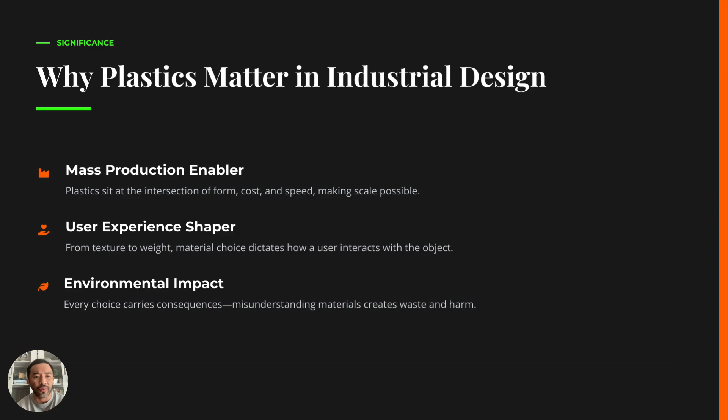Plastics are very powerful because they sit at the intersection of form, cost, speed, and accessibility. So, a designer who understands plastics can control the scale by which you apply your plastics onto your products in industrial design. A designer who misunderstands plastics can also create waste and failure or harm in the environment.

So, how do you read a material? What key properties should you consider when it comes to choosing plastic? I'd like you to think of the material as a system and not just the material as it is, and not just as a data set or some numbers. Every property affects the form, the manufacturing, the lifespan, and the disposal of the product that you are designing. Good industrial designers do not just memorize these properties, but they interpret them.

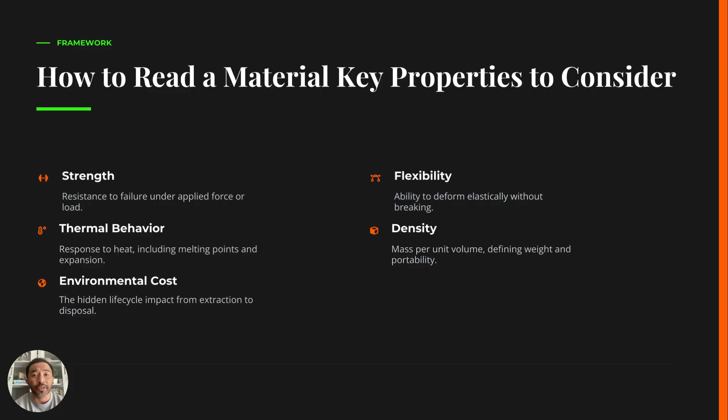So, for example, the strength of a plastic, the thermal behavior, so how it responds to heat, including the melting points, the environmental costs of choosing such a plastic for your product, the flexibility or the ability to deform, elasticity even without breaking the plastic, and the density of the plastic, which is what defines the weight and the portability of the plastic that you would choose in your design.

So let's talk about ABS first. ABS is the material of controlled toughness. ABS does not shatter easily, and it is a plastic that tends to absorb shock. That's why it lives in dashboards, in electronics, and places where failure would be visible and dangerous.

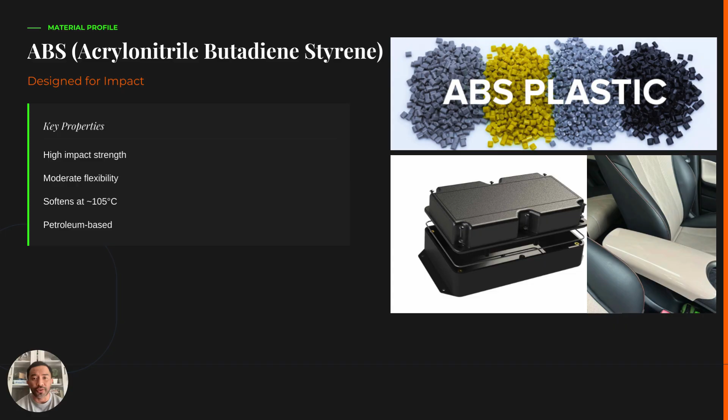But ABS also tells us something uncomfortable. And what is it? It is that its durability often comes at a certain environmental cost. Yes, it is strong, it is moderately flexible, but again, it is petroleum based, and therefore it has some repercussions when specifying this kind of plastic for your product.

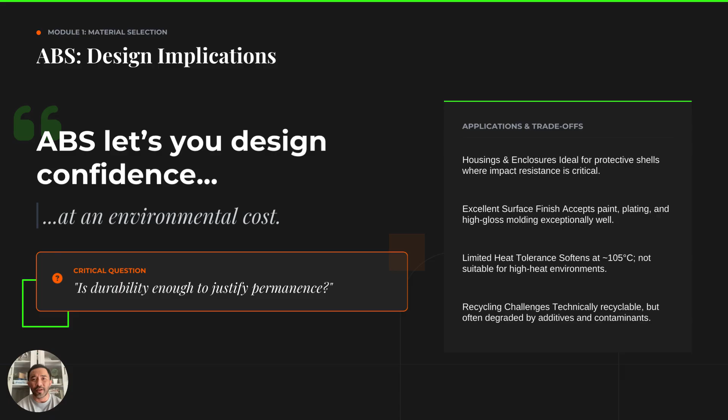ABS also lets you design with confidence, yet again, with an environmental cost. It also locks you into a dependency on petroleum, and it has limited recyclability. So the question when choosing and specifying ABS is: is durability enough to justify the permanence of the product that you are designing?

Next is polypropylene. Polypropylene is a designer's ally when motion is something that you might want to consider in design. It is highly flexible, it is resistant to fatigue, and it is very lightweight. This is very suitable for hinges, for snap fits, for reusable containers. PP also bends without breaking, and it is very efficient and often invisible in daily life. So it means we sometimes take its properties for granted.

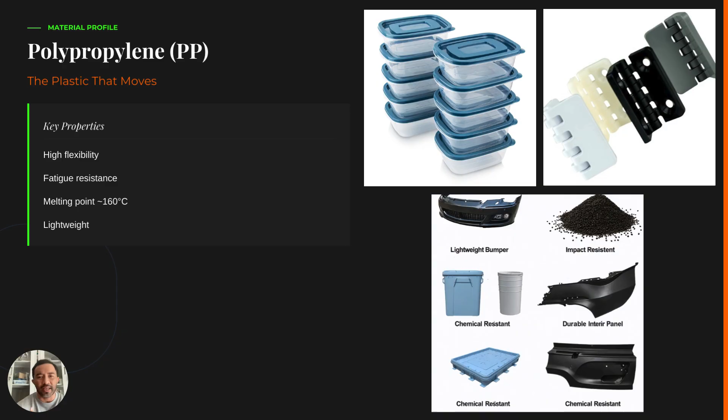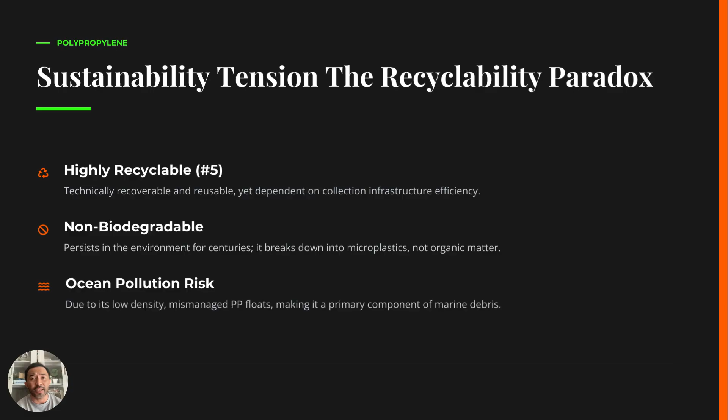Polypropylene is recyclable though, but recycling is very much a system and it's not really a promise. Yes, it is highly recyclable, but it is non-biodegradable, and it poses a risk of pollution in the ocean. So the material outlives its product logic. Remember, sustainability is not about the material choice alone. It's also about the intent of the product that you are designing.

Okay, so PVC, or polyvinyl chloride, is a controversial plastic. One of its key properties is that it is strong and it is rigid. It is very flexible and is high density, so it is compact. And it can be found almost everywhere. And that's exactly the problem that we have with PVC, because it is cheap, it is durable, and it is very adaptable and flexible.

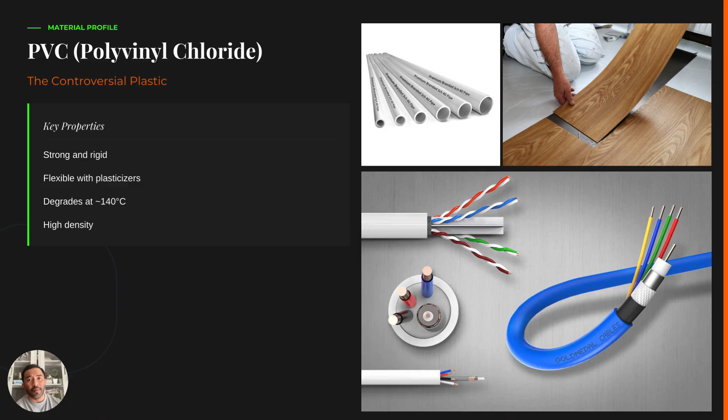But it also carries one of the heaviest environmental and health footprints among all the plastics. So yes, it can be very harmful to the environment. PVC forces designers to confront ethical concerns when specifying it, because it is very difficult to recycle. Just because a material works does not mean that it should necessarily be used.

Industrial design is also not neutral when it comes to PVC. It can be very political in terms of government regulations. Of course, the choice could be an environmental one and also a moral one.

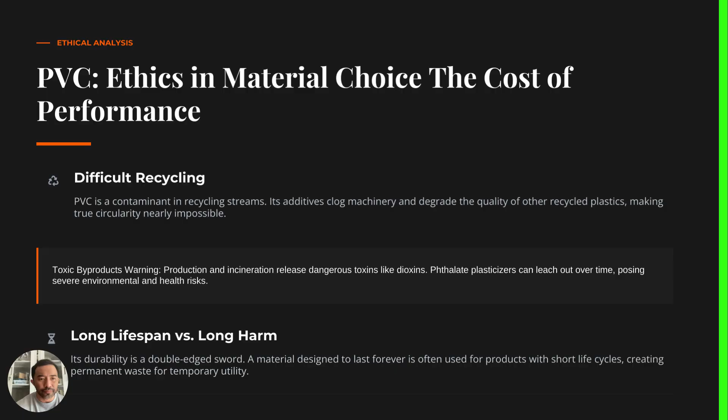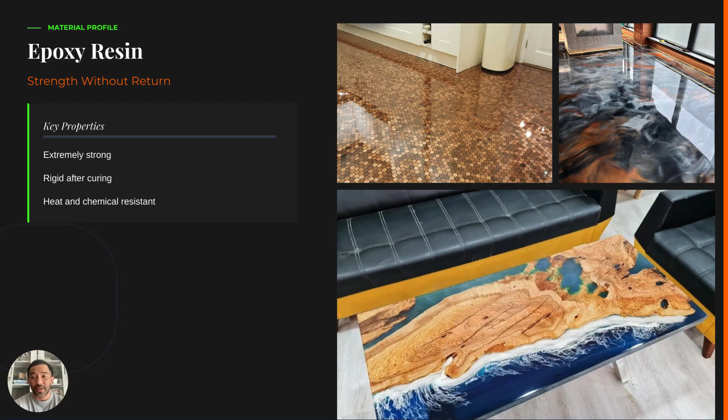So once epoxy is cured, it can no longer be undone. So that is what we should be considering when using epoxy, and that is what makes epoxy very powerful. And at the same time, because it cannot be undone, it is also a dangerous material in terms of sustainability. Epoxy also reminds us that some design decisions are what you may want to call irreversible.

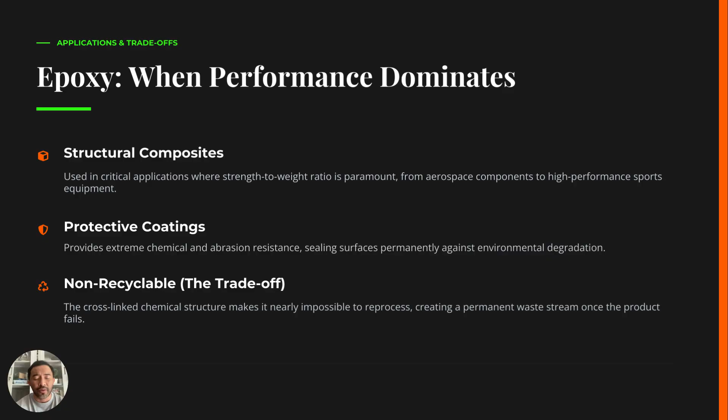When you want to specify epoxy, use it when performance of the product that you are designing is very critical, but acknowledge also its end of life costs. Please do remember that responsible design begins with your foresight as a designer. So again, because it is non-recyclable, that is the trademark, or rather the trade-off of this certain plastic.

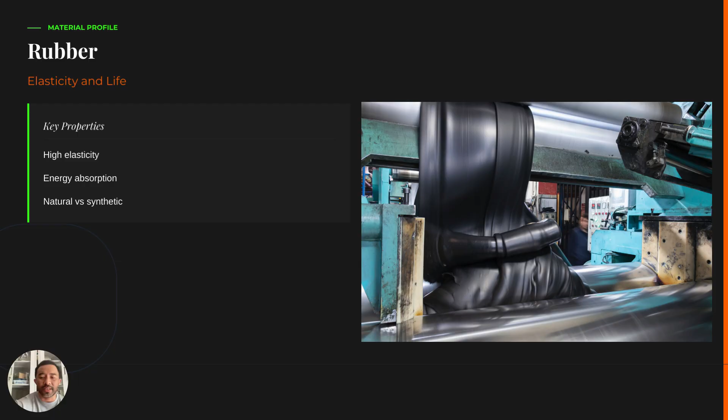Okay, so let's go on to rubber. One of the key properties of rubber is that it is very much elastic, and it absorbs energy, high energy absorption. There is natural and synthetic rubber, so you have the choice, because rubber again is very absorbent to energy. It acts like a cushion, and natural rubber gives us a glimpse somehow of biodegradability of plastic. But at the same time, when you use and specify the synthetic kind, it reminds us of dependence of this industry.

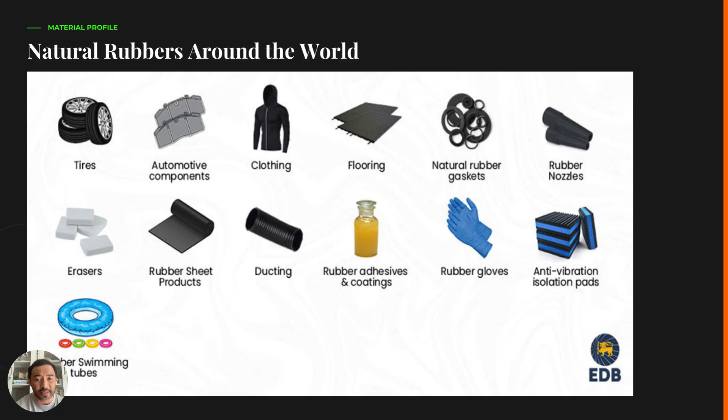So, rubber is used heavily in tires, in clothing, in flooring, even in rubber gloves, in rubber adhesives, in certain ducting, even in erasers, in rubber swimming tubes, rubber sheet products, and so much more application. And as I mentioned earlier, it absorbs energy, so it is also used as an anti-vibration isolation pad.

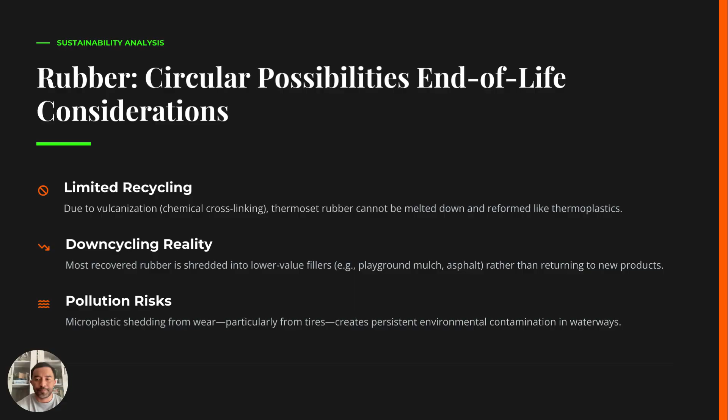And the pollution risk that comes with rubber is microplastic shedding from the wear, particularly the ones used in tires, and it also creates persistent environmental contamination in the waterways. So, if you compare these different types of plastic, perhaps we can say that no plastic is ever perfect, because design is the art of choosing which you will compromise and which you are willing to live with.

So there is this ongoing tension when choosing and specifying plastic. Do we want strength, or do we want the material to be flexible? Do we want it to be heat resistant, or do we want it to be recyclable? And do we choose plastic for its performance, or do we really want to be ethical in the choice of plastic for the product that we are designing?

And so, as industrial designers, we could most probably reflect that you are not just making and shaping objects, but you are shaping systems, you know? Because when you use plastic, you also consider not just its use, but the waste that you are generating when you use this type of plastic. Of course, the labor also, and the environment, its environmental impact.